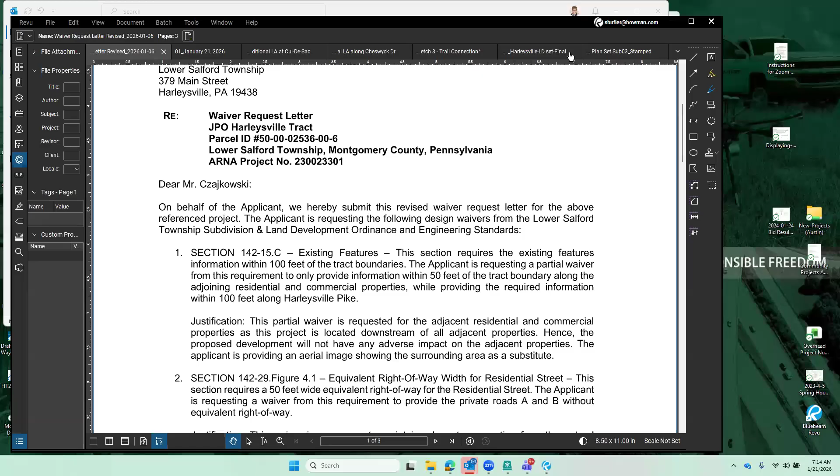You're welcome. Everyone's fence is a little bit different. Sorry to throw these at you, I have to kind of bring these up. We're trying to work through it. Sorry, I just need someone to tell me when to put what plan up — it would help because there's a lot of attachments. So if somebody can communicate that to me to help the discussion, that would be great. Thank you. Thanks, Stephanie.

As we work through the waivers, which I'll talk to you about next, I just want to point out that the fence along the perimeter is a hodgepodge of not-so-great fence. At the last meeting, we agreed to do a 2-rail post and rail along the entire perimeter as a give back to the neighbors to try to soften the blow. We have tried to work with the residents as best we can. There are some that are still not happy, and I can't do anything about that. We've done the best we can with the frontage improvements, what we can do along the perimeter, which I'll show you, and in offering that fence, which we've committed to.

So next, we'll talk about the waiver. So where is that map in relationship to Cheswyck? Cheswyck is right to the left. Yeah, okay. Meeting House is opposite the proposed access.

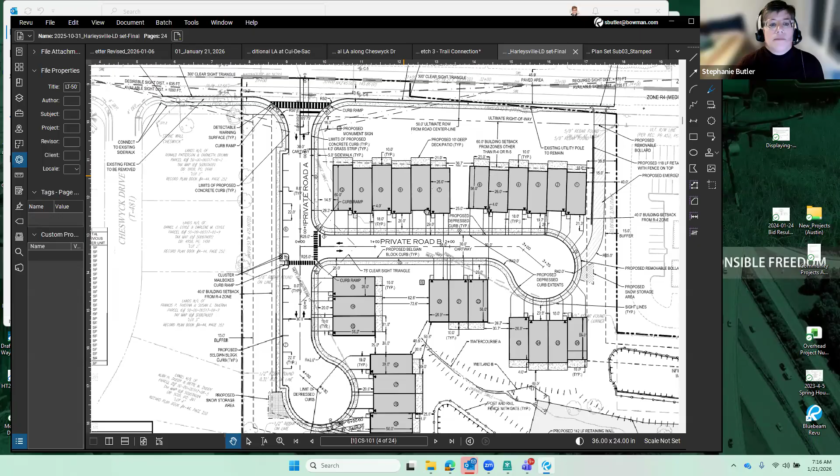Excuse me, can I ask a general question? Going through the 13 waivers, I'm here with a few other neighbors. When is it appropriate to make comments or ask questions? Do we do it for each of the 13 waivers, or do you want us to hold comments to the end? We're just looking for protocol.

I think Ms. Pianzio is going to go through each of the waivers shown in the letter, and if you have comments at that time, you can certainly bring them up.

Okay, so for each of them. These waivers are recommended by your planning commission, all 13 of them. We went through them. We'll start with the first one, existing features. This is a common waiver, you've seen this all the time. We've provided the appropriate data to show the necessary information. Your township engineer, I believe, is satisfied that the appropriate information has been delivered, and no one has an issue with this waiver giving enough information on the existing features.

Any comments on that from the audience? Yes, hi, I'm Lori Yamashita, 470 Wexford Circle.

When I've been to the board before, I introduced myself as my background is safety and environmental. I worked with Merck during land developments. I'm also a volunteer who does sports with people with disabilities, biking and skiing specifically. I really appreciate all of the great Lower Salford amenities that we have, specifically the bike trail.

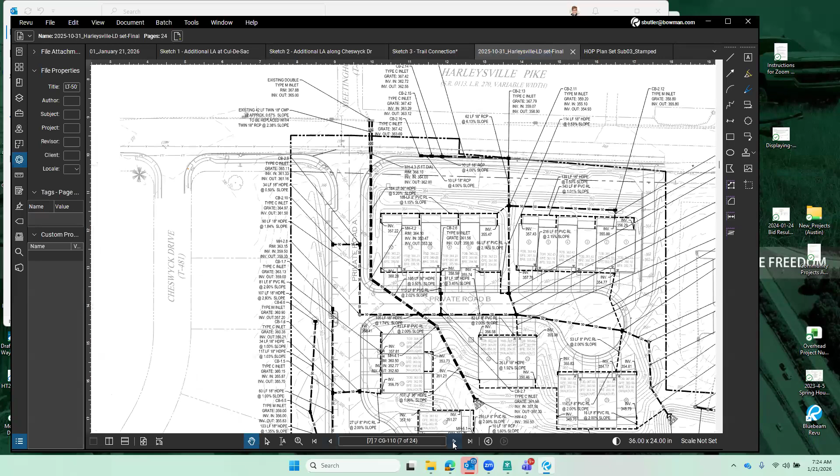Just a short comment after that - I know the surveyors have been on Cheswyck residents' property without permission or notice to do the surveying on Route 113. So was that trespassing? I'm not going to comment. We're here to talk about waivers and I'd like to keep the conversation to that. We've done this a lot at the planning commission meeting.

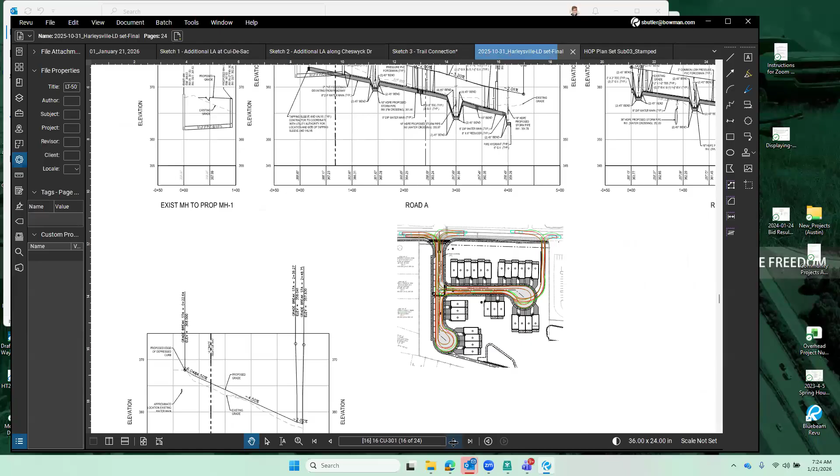Any questions from the board on the existing feature beyond the boundary being 50 feet and lower than 100 feet? This is just information that goes on the plan outside the boundaries of the property. So if there's a tree next to the property, not on this property, they need to show it on the plan. It says 100 feet, but a lot of times you can't do that - you can't really go into their property to show everything. They may show an approximate location of a house, but it doesn't really change the property we're talking about, or you can't change that anyway. It's just to show it there on the plan - that's really all the information.

And to satisfy those questions, they'll use an aerial photo as opposed to physically going on the ground, which is actually more accurate than you'd think, except maybe elevation might be off a little bit. Generally you'd tie that in with a survey - it might say the elevation is 196 on their property, but it might be 195, and you'd change that with the survey, but then tie it all in later.

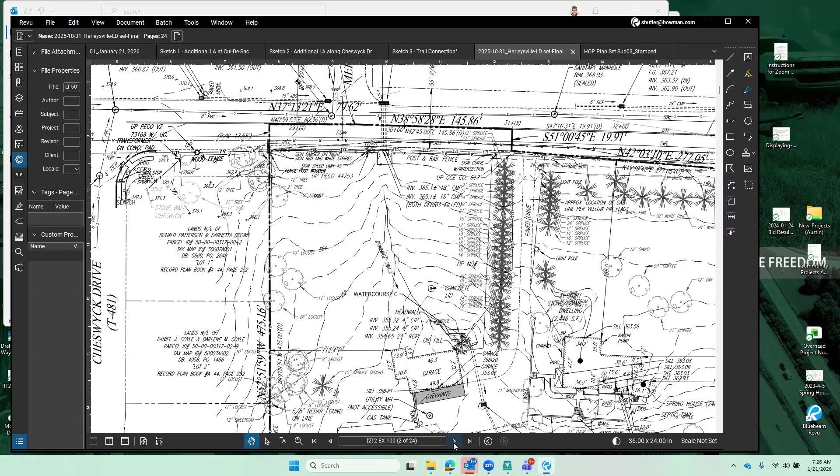So really you just see a line, the property line right there towards Cheswyck. They're only showing 50 feet onto that property as opposed to 100 feet, which would probably be closer to Cheswyck Drive there. That's just to show the grade and stuff like that. What is the distance there between Cheswyck Drive and the line? How far is Cheswyck from there? 238 feet. It looks like over 50 feet there.

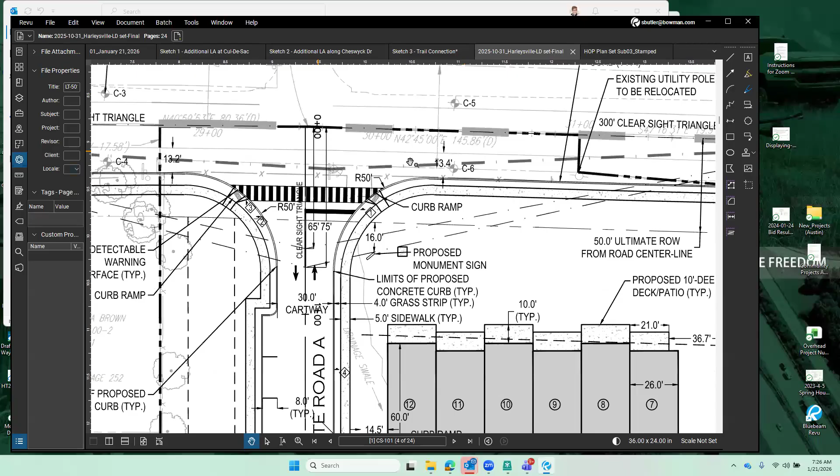Can I move to the next waiver? Did you have a comment? I just saw the bearing and distance at the top of that, opposite road A - can you just change it to a plan that has bearing and distance up there? There is a bearing and distance right here, north 42, 45, 145.86. So the length of that line is 145 feet. The length of the distance of the edge of the property to Cheswyck Drive, you're saying is longer than that? Could you zoom out a little bit more?

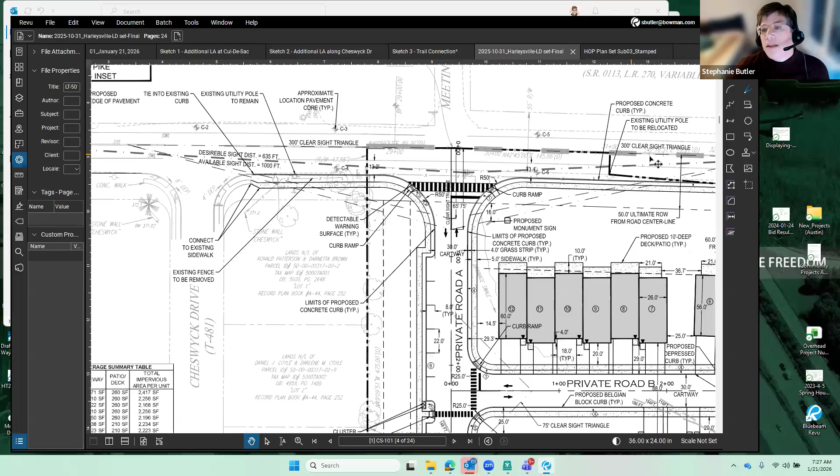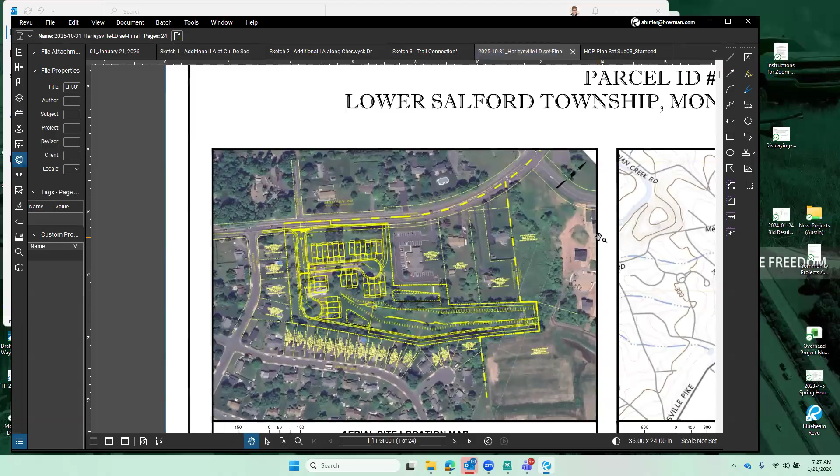Let's see, I don't have the scale. Oh no, you're good, you're good - I just wanted to be able to see private road A and Cheswyck Drive. So the line on top is 145 feet. The distance between Cheswyck Drive and private road A, are you saying it's more or less than 145 feet? Well, this line is only 145 feet between a point of intersection with this bearing and out a certain distance to the next point of intersection. Do you have the record plan? Let me see, give me a second. Do you want to map it? The center line of Cheswyck to Meeting House is 238. Okay, thank you, we answered it. 238 feet.

The next waiver has to do with the width of our private roads. Your code requires a 50-foot wide right of way. We have private roads A and B, so we've asked for a waiver to have less than the 50-foot wide right of way. Being private streets, it's common for us to have less than 50 feet, and we'll be maintaining these by a private HOA - it's not for the township to maintain, so it's common for this waiver to be granted. Is the fire company okay with that, in terms of getting equipment in or out? I think I know the answer, but I just want to ask. Yes, they reviewed it. Very good. Any questions on that?

Underway. Thank you. Next, 3, the distance between our road A and Cheswyck Drive. Your code requires a spacing of 800 feet. The separation is 238.6 feet. Again, this is dictated by PennDOT. They were adamant that this alignment be across from Meeting House.

And you've received your highway occupancy permit, better known as HOP. We have, from the department, yes. Very good. Any questions? Yeah. Yes, sir.

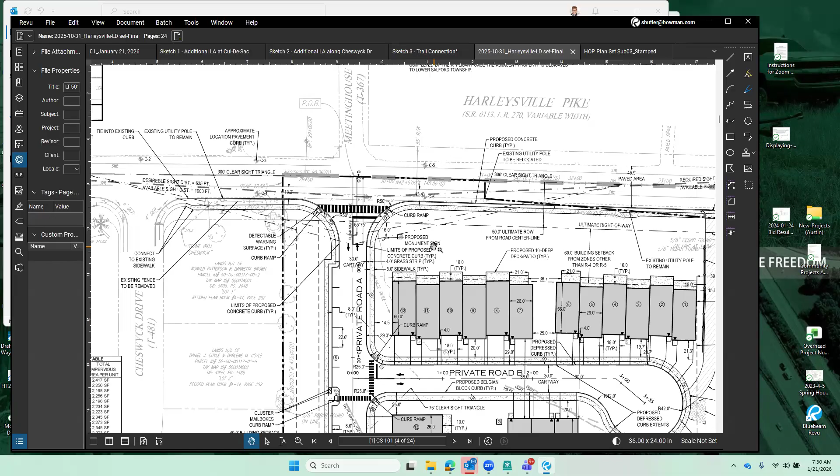At 45 miles an hour, 238.6 feet, right? You're essentially getting 3.6 seconds versus what DOT requires, about 12 seconds at 45 miles an hour. Now I'm along 113 and I know speeds are much greater than that. You know, there's a rush to get to 55 and beyond from the light at Atlantis. My point is, is it safe?

Pennsylvania Department of Transportation issued a permit for that driveway location or that roadway location. So they wouldn't issue a permit if they did not deem it to be safe. And the 800-foot requirement is a township requirement. It's PennDOT that has dictated that it's safe and that the distance is acceptable.

Isn't that also a federal, like an AASHTO type standard as well as state? I don't know. All I know is that PennDOT is in charge of 113, so any improvements or road opening to 113 is under the jurisdiction of PennDOT, and they've issued the permit.

Mr. Bergman, I understand that your background is in engineering and you do have significant experience in intersections. Would you consider taking a deeper look at these plans and coming to your own conclusion on whether this intersection is safe? And I would also like to request Ori to look into the crash history at these intersections to bring some data to the group to consider.

So part of the permitting review process of the location of that driveway would have been PennDOT's analysis of those various factors, along with speed of the roadway, the volume on the roadway. So I could look at it from now till doomsday. The result is going to be the same since the department has issued its permit. My request is that you look at it between now and... I have no objection with what they're putting forth, frankly, with the design that's here, coupled with the fact that the department has approved that location. Understood.

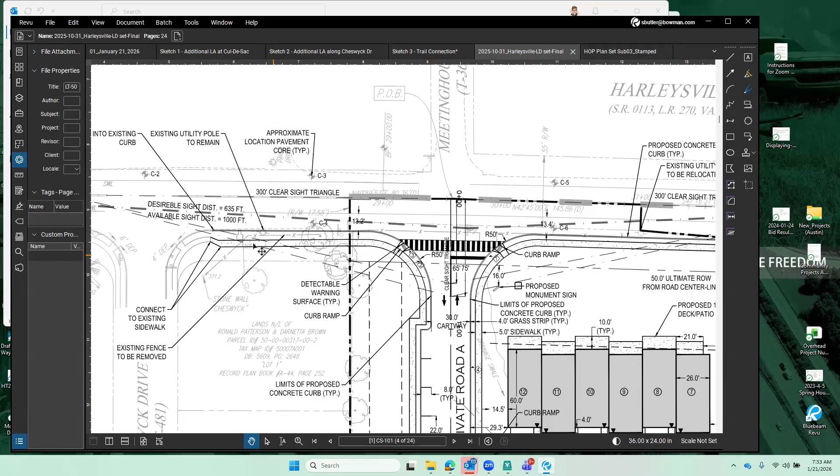My question is the 1,000-foot visibility from this new proposed road to Cheswyck Drive. I think if you can expand that, does it say 1,000 feet? But if a car were leaving Cheswyck, say making a left, big truck, they don't really have that much visibility, do they? I'm sorry. I'm saying, available sight distance 1,000 feet. Am I correct in understanding if a car came out of Cheswyck, they're blocking the visibility from people for the new road? Like a big school bus full of kids coming out here, driver at Meetinghouse is gonna see that big truck or bus.

Isn't that a concern? No, it's not a concern because that's not the way it's analyzed, frankly. So there's clear unobstructed sight distance from road A or the new access, 1,000 feet to the left, which is measured from that point on the new roadway to the middle of the oncoming lane. So same is true for those departing Cheswyck Drive. And because of the distance between the two, they're not going to interfere with one another's ability to see in either direction. That was reviewed. And Stephanie, I don't know if you want to weigh in on this, but that was, I'm sure, something that you looked at. Permanent structures too.

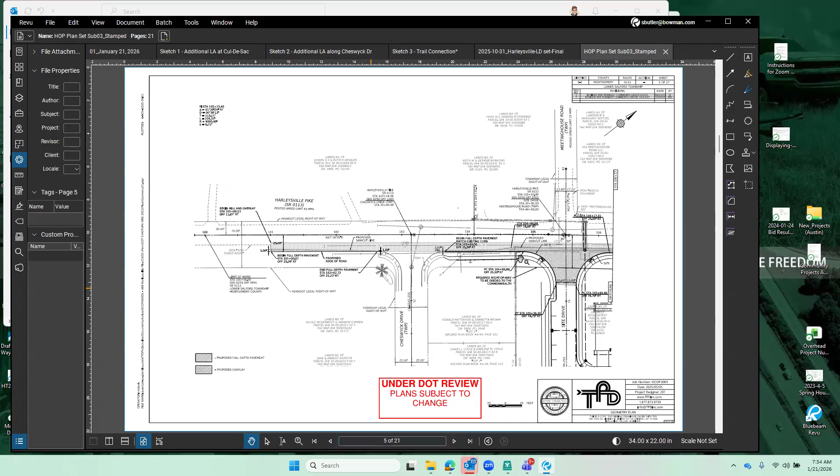Yeah, it's not a movable vehicle, it's a permanent structure. And the sight distance is clear at 65 feet back, and where people are going to be looking is at the stop bar, even closer, so the visibility is even greater. And I would also add that just because a stop bar is at a certain location, that's not necessarily the point where your clear egressing sight distance is measured from.

There are requirements to measure from certain distances back from the edge of the travel lane. If you stop at a stop bar, you are required to move up to a certain location to make sure that you have that view and that clear sight distance. Just to speak to if a car or a bus or something was at Cheswyck and that was blocking that line of sight for Road A, the driver in Road A is obligated to wait until they have a clear line of sight, and vehicles are not considered an obstruction because they are movable objects.

So the measurements are taken at a certain location per AASHTO, per PennDOT guidelines, and they have requirements for those distances, and they don't always line up with where the stop bar location is, but a driver is obligated to move up to that position to make sure they have a clear line of sight, and that's how the measurements are determined.

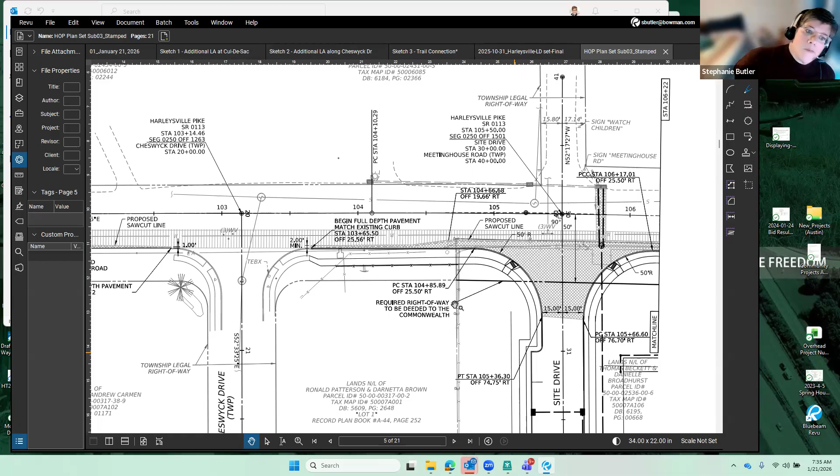I have one suggestion for consideration. Wouldn't it be more safe if we had the new development be a right turn only out and a right turn only in to perhaps make it easier? PennDOT did not believe so. Okay, just one request for later, if at the next planning commission meeting, Stephanie, can you tell us what engineering provisions there were to improve that?

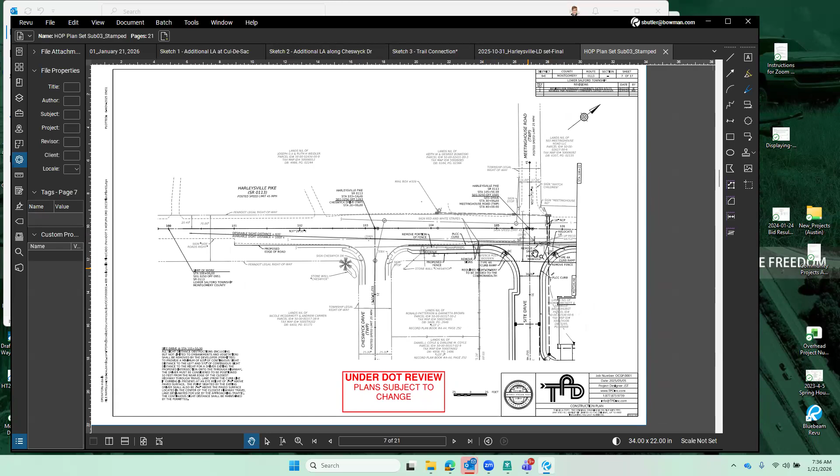I know you weren't a fan, if I recall, of the left turn lane, but by widening 113 towards the new development, I think if someone's making a left into Meetinghouse, they're most likely gonna go at full speed down the shoulder in front of the development. And that's where we have a bike path and possibly a place for school kids to wait because the school bus can't go there. So I guess I'm afraid there's just going to be more speeding down the shoulder, now in a different direction.

Going the opposite way as people are making a left into Cheswyck, people speed on the right side shoulder. That's my concern overall, is just the safety. I understand it's approved. I understand all the experts looked at it. Those of us who live in the area, we're concerned with that intersection.

So that's an existing condition, and that was one of the concerns when those two center turn lanes were proposed, is that the shoulders disappeared and people didn't have that ability, which everyone needs on 113 to get around those waiting to make turns. So those shoulders will still exist. People do use them to go around people. That will continue. The other thing is school buses are not going to come into this development. They're going to pull along 113.

Someone made a good recommendation at the last planning commission meeting about us maybe broadening our sidewalk area there for like a way station for kids who are waiting for the bus. And we are going to incorporate that in our plans. We thought that was a good idea, but they're not going to come in and out of this private street.

So that was the next waiver. Obviously, we vetted that one. Do you have any issue with that? That was number 4. We can move to number 5. Any questions about clear sight triangle? I guess just the one thing I have on section 3, I understand the planning commission approved. Could I just hear a little bit more about, since the 800 feet is a township requirement, what was the reasoning and the rationale for going from 800 to 238?

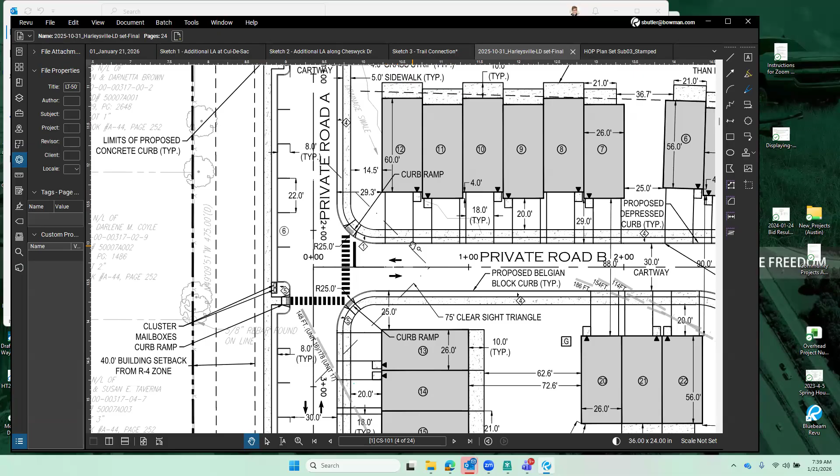Because this is such a low volume intersection, the waiver is to permit that. Planning commission saw that, there's not much activity there, not much reason for concern. It is a slow movement and there's not a lot of volume coming down from the left in order to make that any safety concern. I think staff thought the same.

Stephanie, any comment on that one? I do not have any concerns with the low volume and the location at this point. And the private streets. Any comments, questions from the board? Will there be any on-street parking in this development other than the ones on the entrance drive there? One side of road A has parking. Right, but beside that, I can see those parking spots, but nothing else anywhere. No.

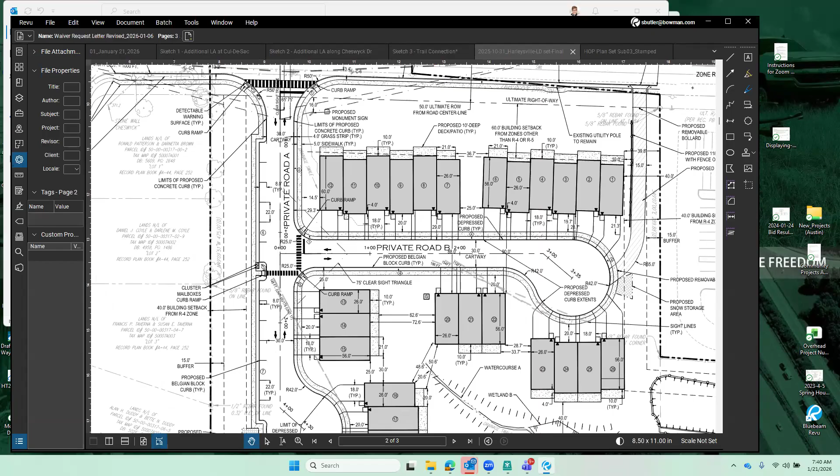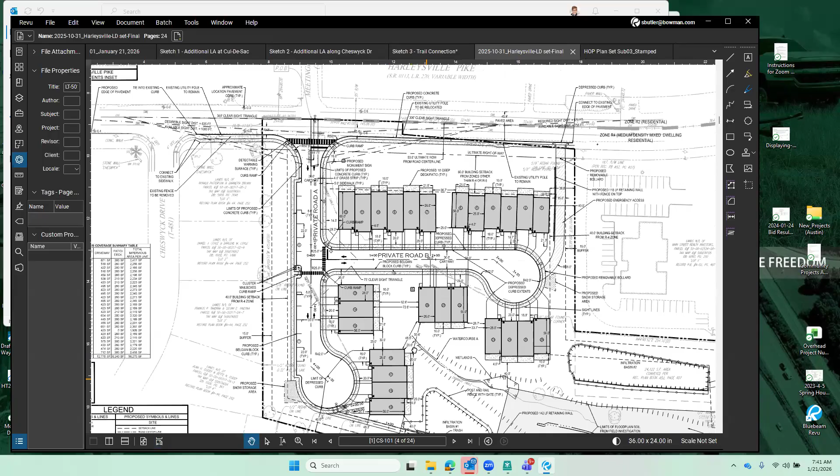Okay, moving on to number 6. The basin slope. You have a 4-to-1 basin requirement, however, DEP's recommendations are inconsistent with that. So we are asking for a waiver so that we can comply with the recommendations from DEP and their E&S control manual, which is 3-to-1, from 4-to-1 to 3-to-1, the standard. Yes, for reference and background, I think future editions of our SALDO may include a 3-to-1 allowance.

Your new stormwater ordinance will show 3-to-1. Yeah, because 3-to-1 is standard in the industry. I see this all the time. Allows grass to grow still. A little outdated, a little antiquated. Some townships just like keeping it in there, so we have to ask for it. Fair enough. I have a comment, question on that one.

Certainly. It sounded like you were stumbling over your words a little bit. Can you explain? Okay. So the waiver is for a 3-to-1 basin slope instead of a 4-to-1 basin slope, and that is consistent with the state standard. The township standard has not been updated, but the township is updating their stormwater management ordinance to coincide with the state standards. It just hasn't done it yet. I'm just trying to follow along with the numbers here. That's number 6.

If you have the updated waiver list. I might not have the updated one. Would you like a copy? Yes, please. Is it January 6th, 2026? Do our adjacent townships have a 3-to-1? Pretty much standard 3-to-1 slope, right on the state. If they don't have it in their code, they always grant it. It's missing on this sheet. My sheet goes from number 3 to number 9. Okay, that's the page.

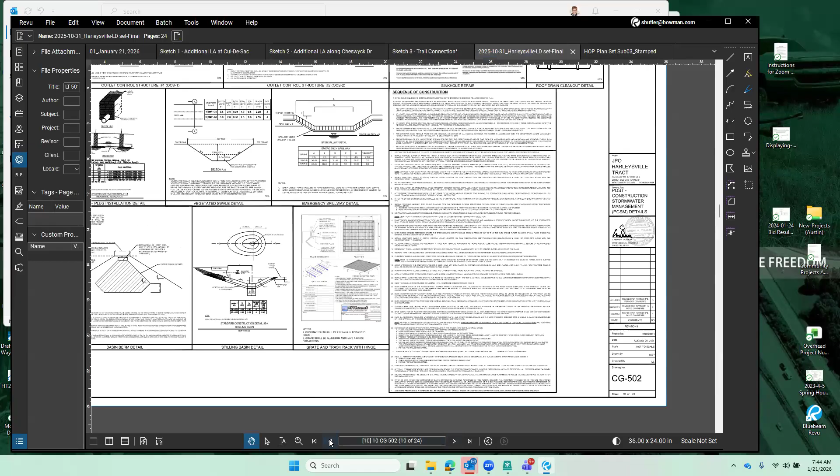Next, the path. So we have an 8-foot wide walking path, as you can see from our cul-de-sac bulb. It goes along the back property line, along the back of those properties, all the way to the edge. We are also making a connection off-site to the township open space. You are getting open space from a neighboring property, and there is a path there. We are making that connection so that people can walk to the township path on the other side.

So that's 25 feet wide. Your code requires that the path within that 25-foot wide right of way be no closer than 5 feet to the edge. The neighbors wanted it as far away as possible, and we are also staying away from existing environmental features. So we are asking for a waiver so that we can get to the edge of the 25-foot right of way, so that we can accomplish that.

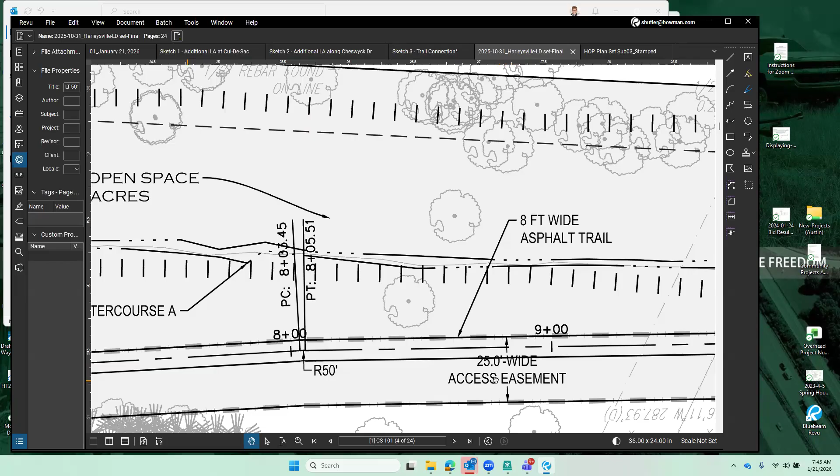Any issues, Michelle? No, I agree that it was moved; it was not centered within the easement because of a request by the neighbors to move it further away, and we have no objection. It will be on HOA-owned property that they will have to maintain. Any questions from the board? Is there going to be plantings between the property boundary and that walkway? Yes, yes. There are existing plantings and then we're filling in.

Very good. Okay, Stephanie, we're going to need the 2 slides that show the side along Cheswyck where we're filling in and that cul-de-sac bulb. Oh yeah, we can start there. Okay, great. The next section has to do with the replacement trees. We have packed this property with as many trees as we can, but planning commission saw a couple areas where we could do a little better. And in getting the recommendation for this waiver on where we are short, they asked us to do a couple of things.

So at the end of this cul-de-sac bulb, we had two shade trees, which are the 2 on the left. The neighbors came and said, we really want you to block the headlights for us a little better. Can you switch them out? So we did. We're going to do evergreens there, and we're adding 3 more to the right. So the 2 shade trees will become evergreen trees, and we're adding 3 new evergreens, a total of 5. They also asked that we make them bigger than normal. We plant 8 to 10-foot evergreens there so that they are robust at the jump. So we've agreed to do that.

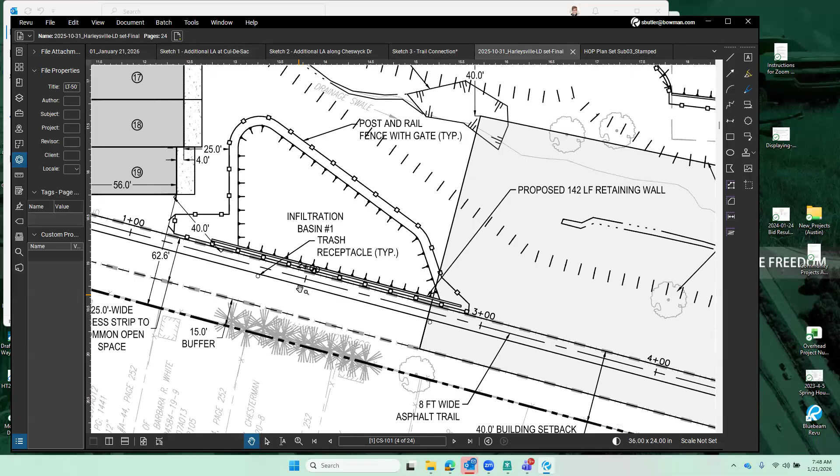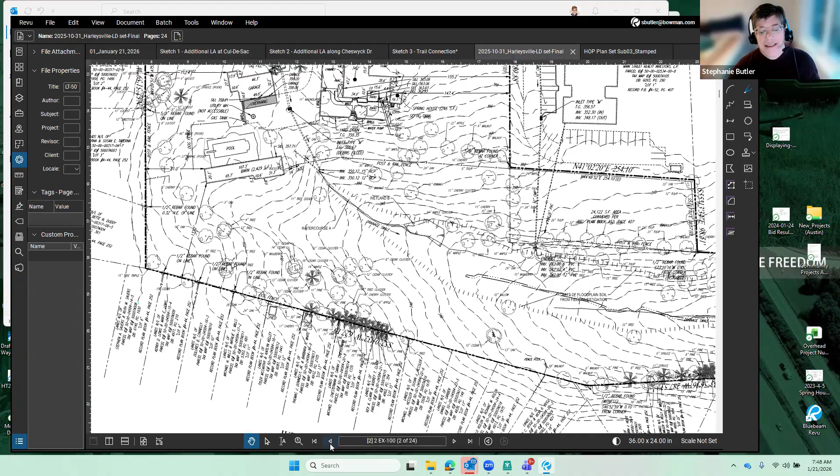Normally it's not something you see with every land development plan, but yes, sometimes it's necessary. We will require a structural engineer to certify that the retaining walls are designed properly. I don't see where they are on that. Thank you, Stephanie, right there. Approximately how high will that be? Hold on, let me go back to that other page. I'm going the wrong way. I don't know these inside and out.

So here's top of wall, bottom of wall elevations. 4 to 5, about 5 feet. And there'll be a fence at the top of that wall? Pedestrian barrier between the trail? Yes, with fence. Okay. Good job.

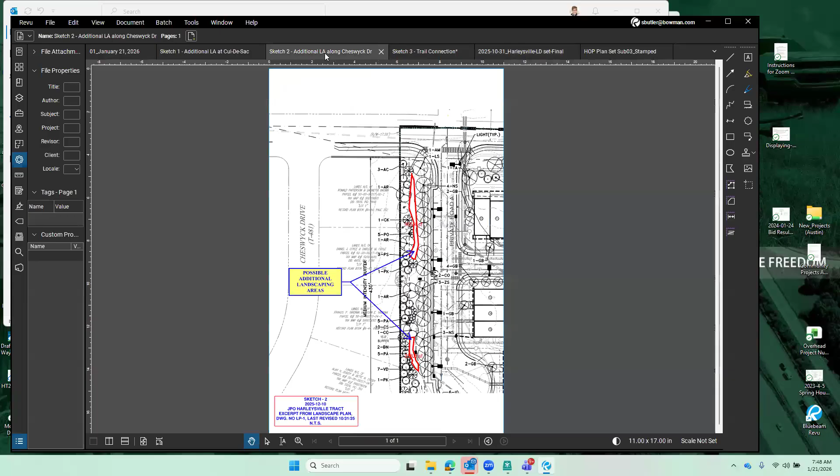Okay, another place where they asked us to fill in some planting. Thank you, Stephanie. So these 2 little pockets that are in red. You see all that planting we have in there? They asked us to fill that in as well, which we agreed to do. What are we filling that in with? Trees, bushes, shrubs, flowers, a combination; the landscape architect's going to work on that. We will look at it to make sure that all of the plants they propose are viable and will survive for a period of 18 months after we certify it as complete. Good answer.

We want to make sure there's room for them to grow, but that it is accomplishing the goal. They want to screen it as best we can. Is there consideration given to native plantings, to avoid fertilizer? Absolutely, yes. Okay, great. That is the latest trend, native. Which is a shame because those green giants are not native, but they grow like crazy. I'm for the native. Yeah, I hear you.

Next is the location of street trees, because I think there are comments relative to that. I do appreciate all the work that's gone into this. The developer is asking to plant only 80 trees where 666 trees are required. Is that the waiver we're talking about here? That is the waiver. The number will go down after we add some more plants. Approximately how much will it vary by? Now it sounds like you're short 580 trees. It'll be less after we add these additional plantings; whatever we plant will come off of that number. But currently you're meeting less than 20% of the requirement? 15%? Whatever that math is.

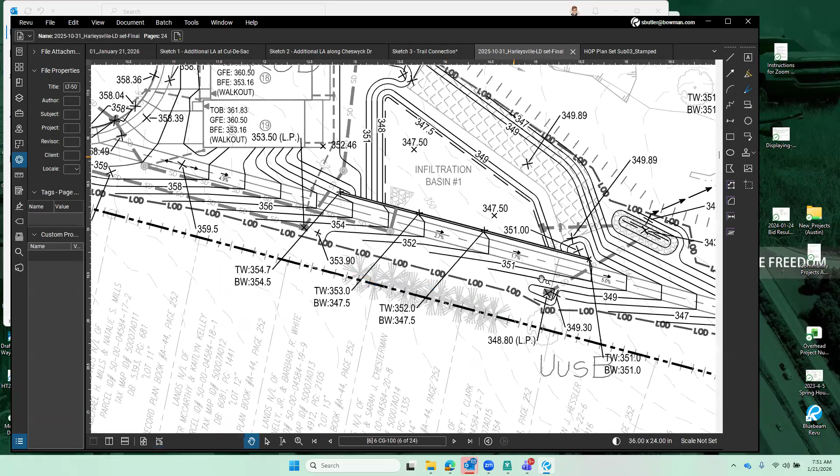So what I would like to point out here is that the variance requested is not the minimum modification necessary. They're adding plants vertically, which I really appreciate. But I do think you could do more. There is some space near the power line trail crossing there on either side of the easement. There's some space for trees. And also, there are some things that other townships do and other engineers do to meet the

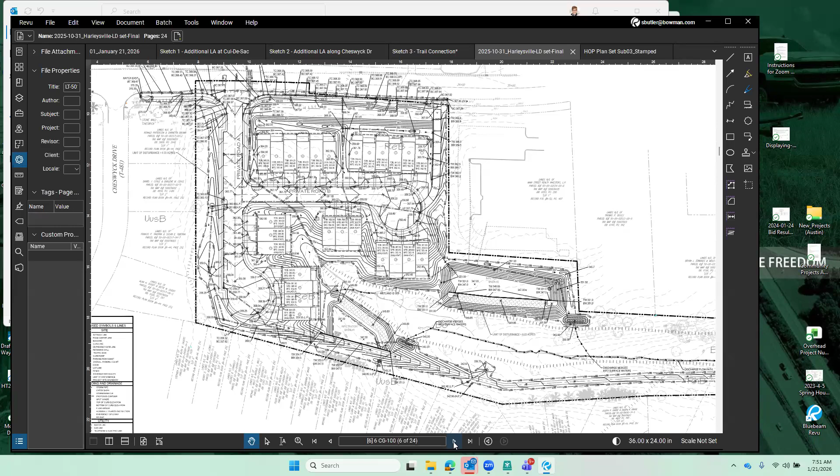protect the public interest by preserving the benefits that large trees provide. That's the word. The variances are supposed to show how they're going to meet the goal of the ordinance. And there are other ways besides just planting more trees if they don't fit that you can try to meet that ordinance idea, even if you can't numerically get the trees in, right? So you could... Yeah, give an example.

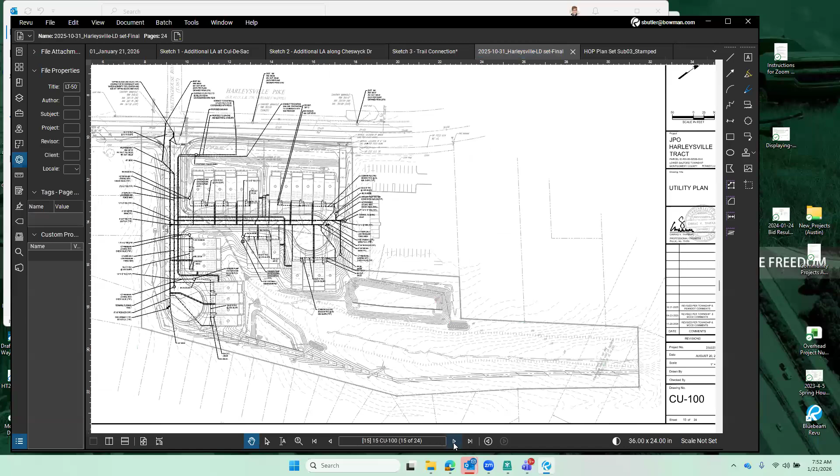Steph, can you put the landscape plan up? I'm looking for it, hold on. And some townships have, if you can't meet the number of trees... I gotta go back to the front and figure out which page it is. You can also allow shrubs to count, maybe like 4 or 6 shrubs to count as one tree, or even count ground cover plantings towards the trees. And there are also sometimes townships do fee in lieu.

So I'd like you guys to consider some other ways that you can meet the minimum requirement. So try to calculate how much you can actually get towards the replacement trees, including all of the various landscape options. And then I'd like the township to consider how you can move this project forward while also continuing Lower Salford Township's commitment to protecting the environment. So I'm not against this, I'm just saying we can do more.

So we planted as much as we can on this property. There are existing features in the middle of the property that would require us to take trees down to plant trees. There's already existing vegetation there that is in sensitive areas. So where there were open spaces, we have planted. The planning commission did identify those pockets where we could do more, and we've agreed to do that. So we just don't have the space. We do want some backyard space for these units, behind the townhouses, as you can see.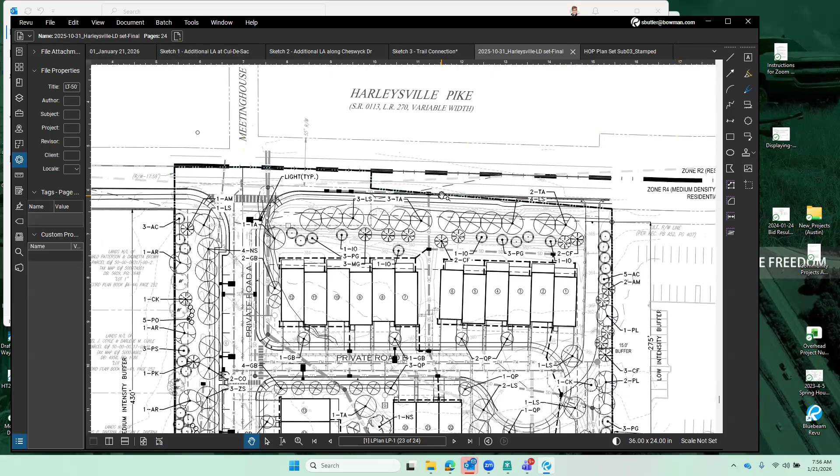Stephanie, can you go to the Harleysville Pike frontage, the screen along Harleysville? There are existing pretty mature evergreens along the frontage of this property, and we were trying to keep them. We think the improvements along the frontage, the widening, is going to lead to their demise, plus we have to do sidewalk installation.

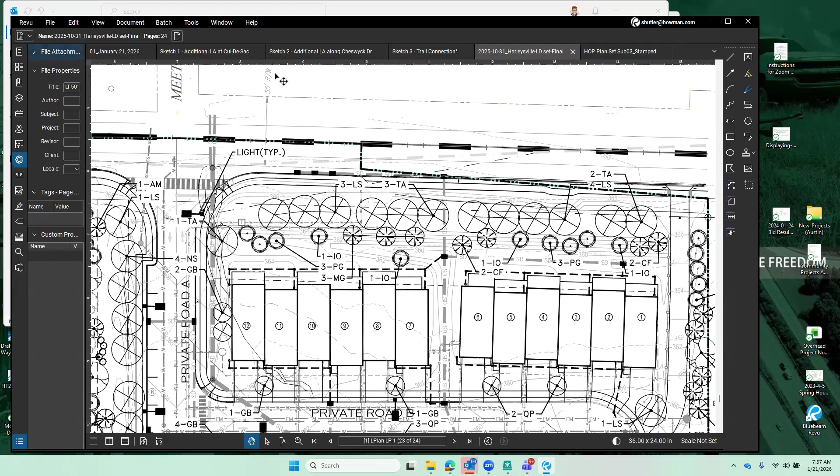So your code requirement is for a berm along the frontage and for ornamentals only. Our waiver is twofold: one, that we plant evergreens and ornamentals, because that'll have more of a robust screening along the frontage, as opposed to just ornamentals.

And there's drainage that comes off of 113 onto this property, so we're asking for breaks in the berm so that water can still come onto our property and enter our stormwater system as it does today. We don't want to block it and cause any flooding issues. So that's what you see here are the breaks.

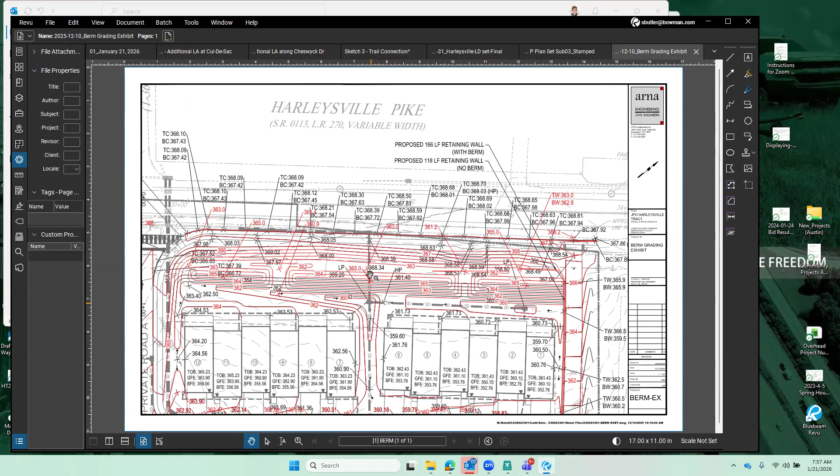Mike, if you can, show where the breaks are in the berm. So you have one there and one over there. That's the partial waiver—we're doing the berm just with those breaks so the water can come in, and we're asking to do ornamentals and evergreens.

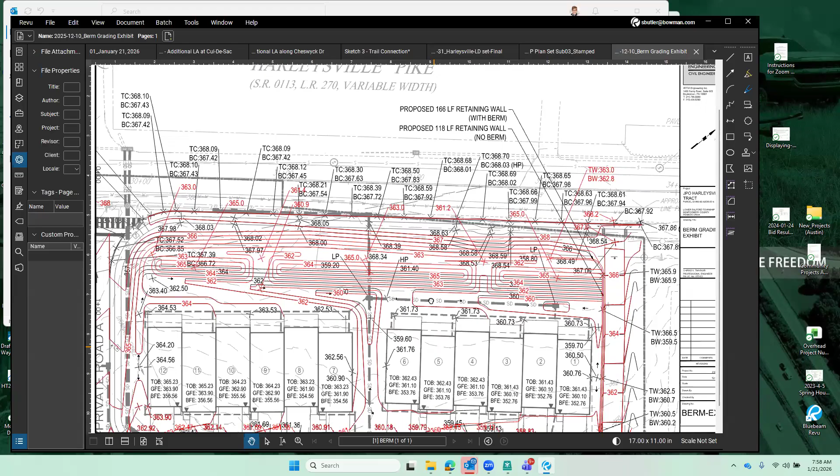And then where does the water go from there? Into the center there, into a stormwater pipe, and then it enters our stormwater system, and we will manage it on our property.

Planning Commission was satisfied with this; they think it meets the goal. Are there curbs along the road? Yes, there will be curb, correct.

How's the water coming from 113, how's it getting through the curb? We have catch basins. Oh, gotcha. Okay, didn't see that. Very good, okay.

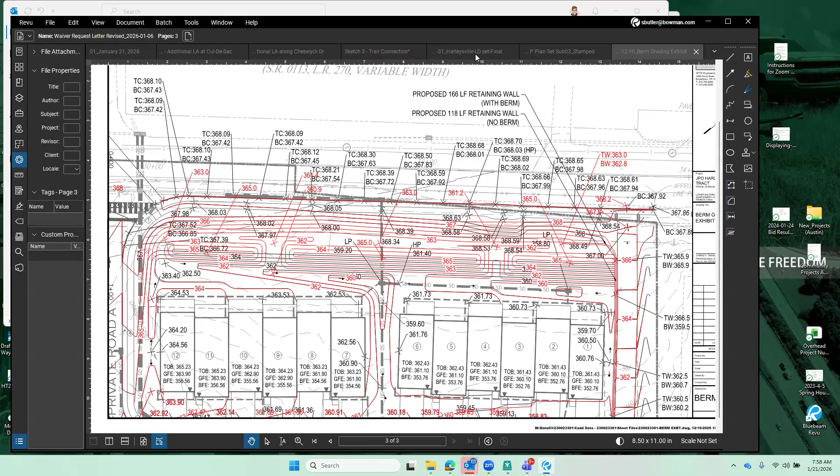Now we're getting into the detention basin plantings. You have two requirements—there's a screen element required between the detention basin and the adjacent residential and office uses. This is on the far right, over there, that little jet-out portion of the property.

We're asking for a partial waiver to use the property line buffer plantings to satisfy the screen requirements. There's basically two planting requirements in the same area, so there's not enough room to plant both. We're using one—you can't plant two plants in the same spot.

Any issues, or can I move on? Any questions, comments? No, okay.

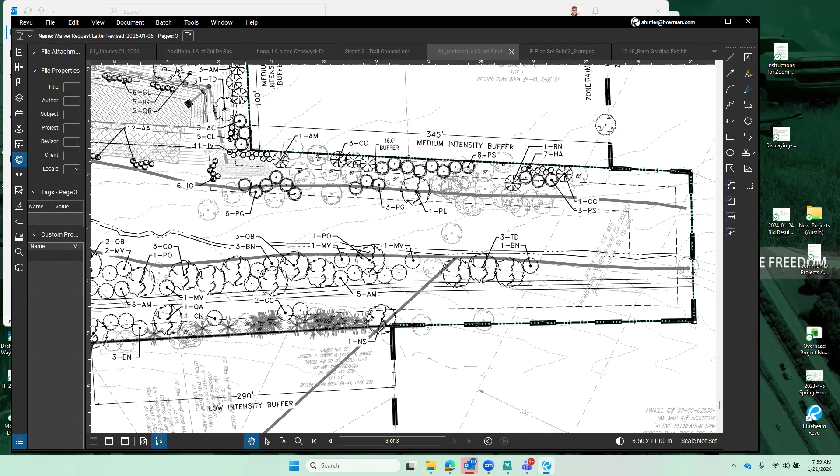Next, your code requires concrete curb. We want to use Belgian block for the private roads—people like it, looks nice, and it's easy to replace. Any questions on that one? Comments?

Last but not least, the basin slope. Your requirement is a 2% slope in order to comply with the DEP stormwater manual. We're requesting a waiver to have a flat bottom basin for infiltration, so we can do best management practices.

Any issues with that, Michelle? No—it is a DEP requirement that they have a certain volume of runoff to keep on their site, and the 0% slope on the bottom allows them to meet those DEP requirements.

Very good. Any questions from the board? Questions for the audience? Just a general comment—again, with the submissions, I said incomplete, inaccurate, and with discrepancies.

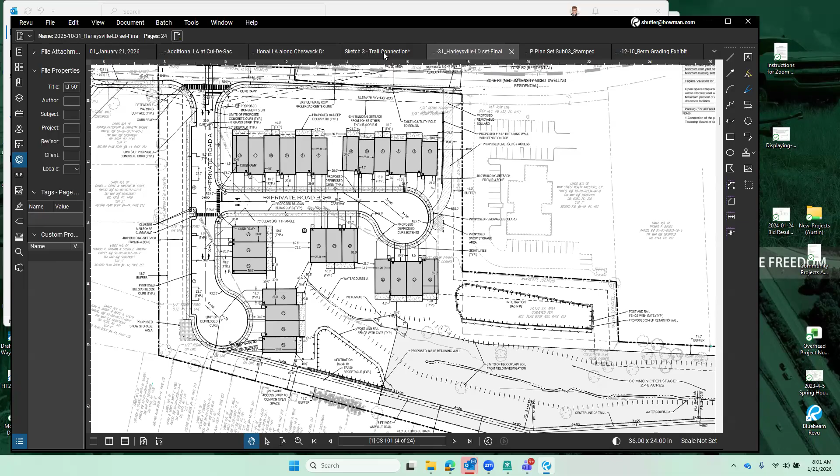I guess when the developer was approaching the planning commission, many of us were surprised that at the time they would be asking for both preliminary and final. When I looked at some of the supporting documentation, one example was in August of 2024, looking for final, but they put in a 200+ page stormwater management, post-construction stormwater management report without an executive summary. So I thought that's unusual.

You'd expect them to just say, hey, everything's okay, on page one. So as I paged through that, it was around page 200, and I brought this up at the planning commission meeting. I said, something's kind of fishy.

For the method of analysis for the proposed network, this statement was analysis yet to be performed for the 100-year storm. It's the kind of stuff when reviewing hundreds, thousands of engineering submissions to the Merck plant site, you'll see something stands out like that. Why did they give me 200 pages when the analysis is not done for the 100-year storm? It made me curious, and I looked at it. Are you on the spot?

Yes, you had signed and you came to the planning commission, and I saw the letters, and the website says Annenbach PE, and the letterhead Arna Engineering PE, Annenbach PE, but I didn't see that your name is on the Pennsylvania professional engineering registration. Is that a mistake? No, it's not a mistake. So you're not a registered professional engineer. You didn't sign your name, but I thought if you are one of 2 principals with Arna Engineering, 50% of the principal engineers are not registered in Pennsylvania. Is that correct? That's correct. It's not a requirement, but yes, you're correct.